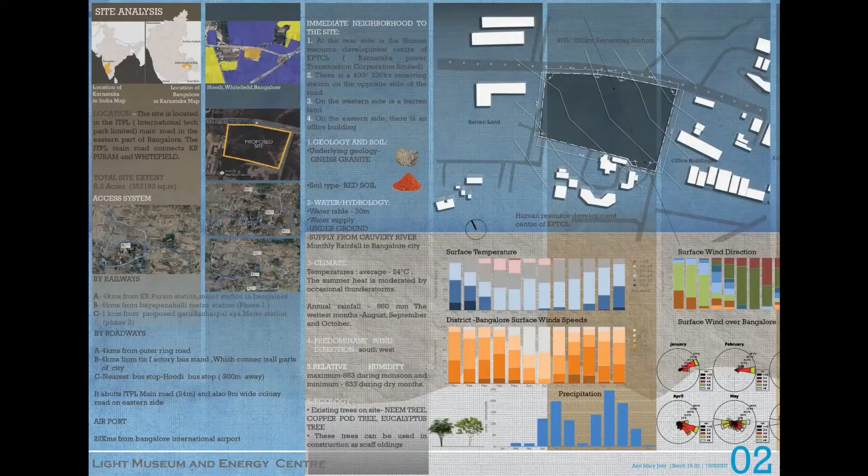It is a flat land with a slope of 3 meters, with a gradient of 1:70. The main attraction of the site is that a metro rail passes through it, making it easily accessible to people.

It has a water table of 30 meters, so the plot can be dug.

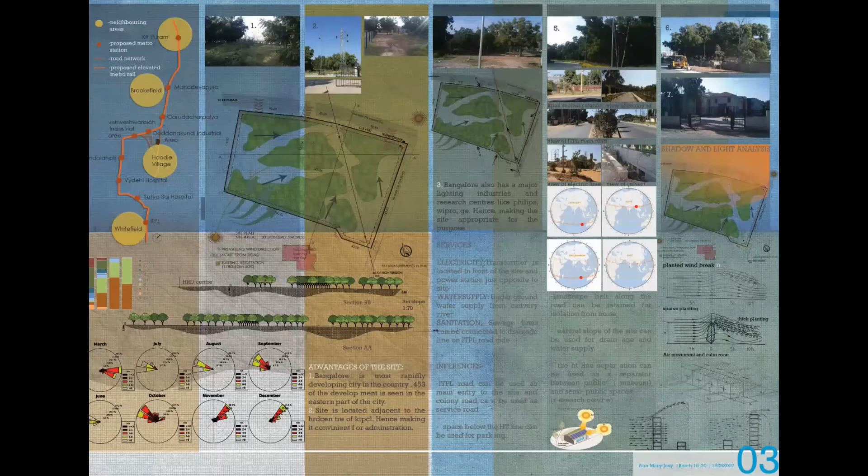Coming to the case study, NGMA Delhi, National Gallery of Modern Art, was basically done to understand the circulation and movement pattern of the building. It also has a good ceiling feature, where the ceiling provides natural lighting during the day.

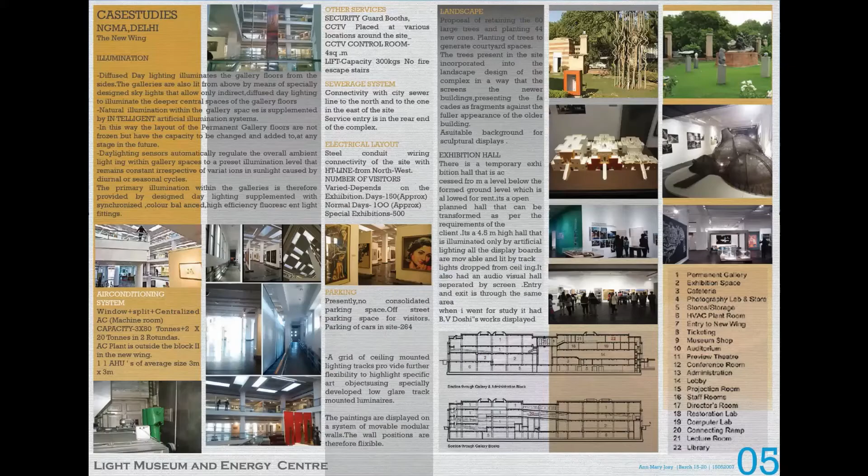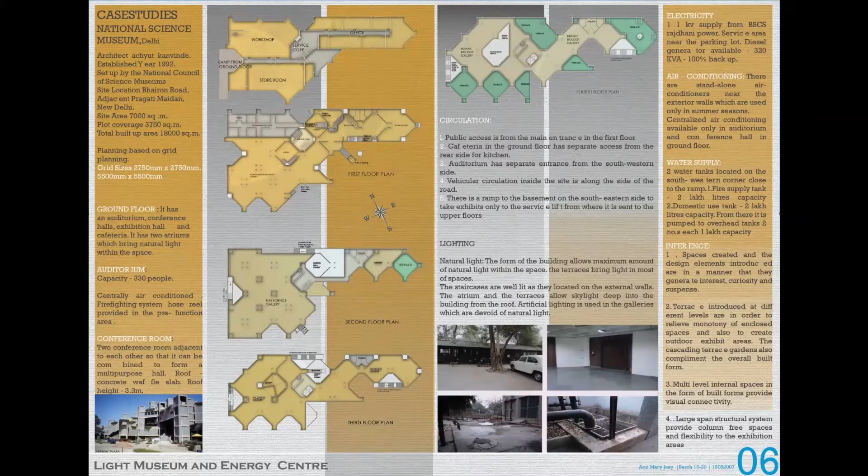The other case study is the National Science Museum, Delhi, which has an unusual pattern for a museum. It is designed based on natural lighting and is a small space compared to other museum type buildings, using natural lighting and ventilation.

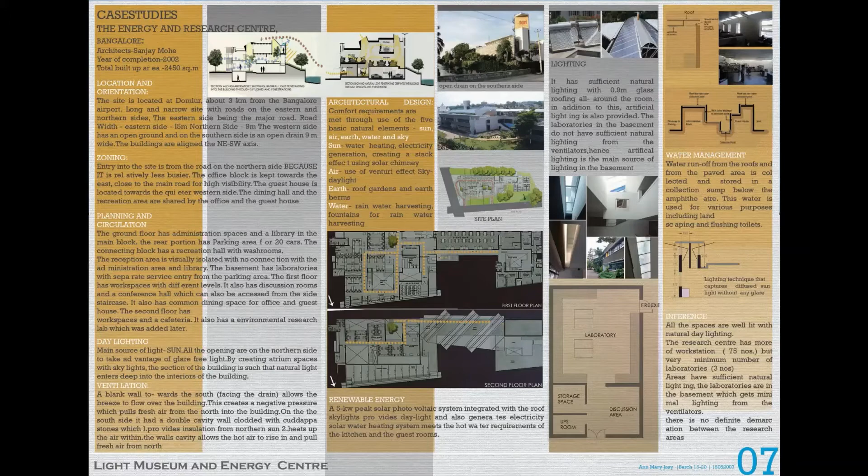The other case study for the research center was the Energy and Research Center, Bangalore, TERI, which was a building designed based on energy efficiency. They used renewable energy, with natural daylighting and ventilation, except for the laboratory part, which requires no natural lighting facility.

The other case study was the NTL Research Center, Noida, a basically rectangular shaped building which didn't allow any natural lighting to come in, as it was a place where thermal tests, lamp life tests, altitude tests, and all sorts of tests were done. So they were very sensitive to the sunlight part.

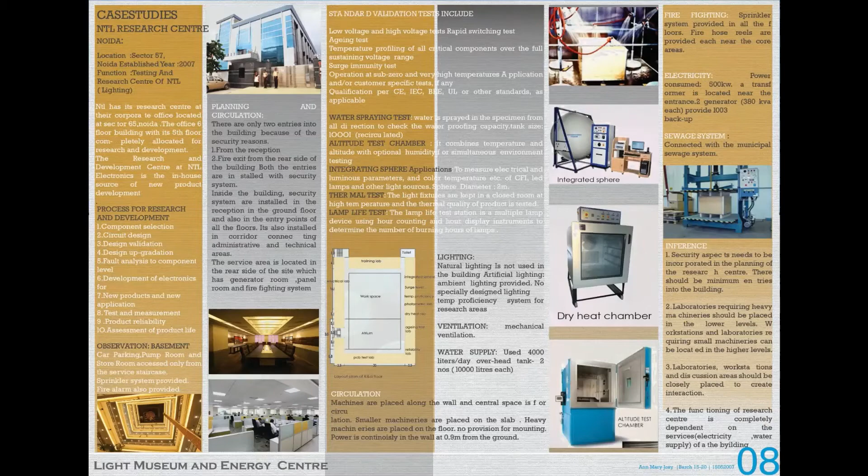And the basic data collection required for running of the museum - these are the equipments, along with their features and dimensions required, that help in building the research center.

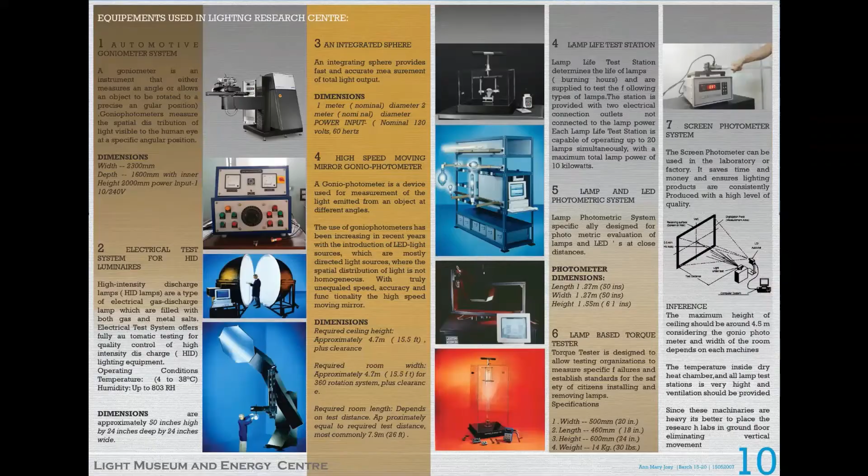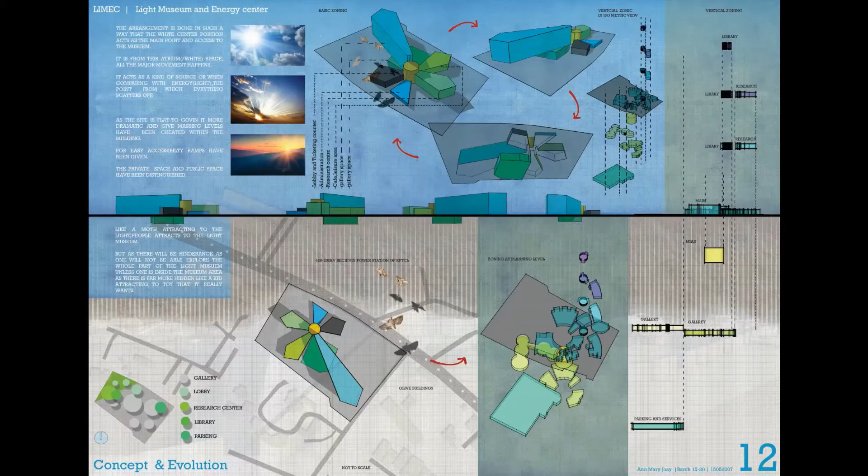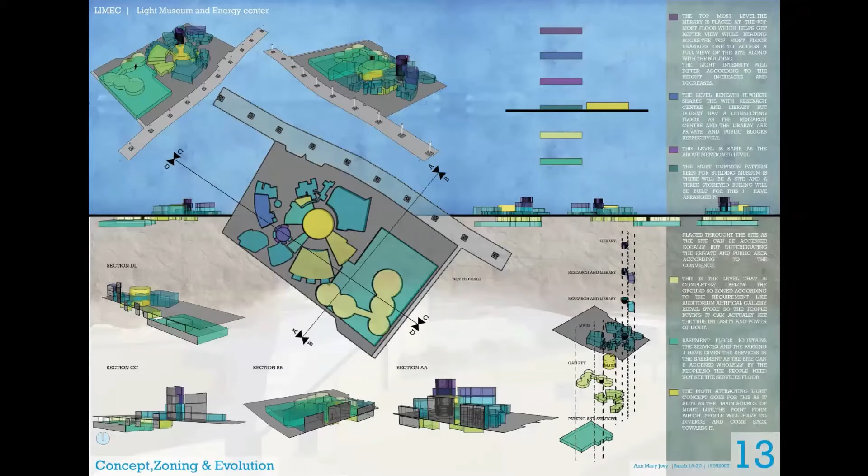These are the zoning and evolution in the site, and these are the proximity charts I've given, which are basically divided into the major museum complex, the auditorium block, the exhibition block, the staff block, the cafe complex, and the research center.

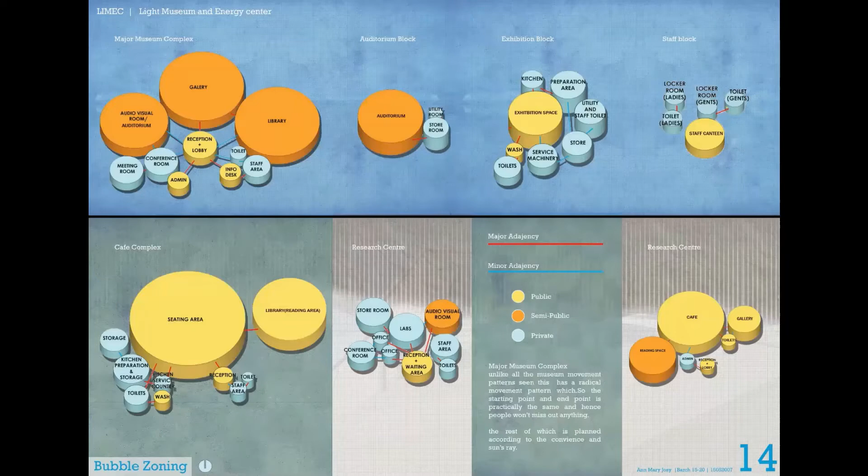The zoning is such that the site is in an industrial area that doesn't have much activity going on, so the only activity that can come up is when the light museum comes up. It is basically divided into private, semi-private, and completely public zones.

All of these are connected by the circulation part, and the basic coverage of sunlight is given for the private as well as the semi-private zones.

As metro is part of the site, it plays a major role, and the buildings are arranged according to it, so that people create a curiosity about what is happening inside the building.

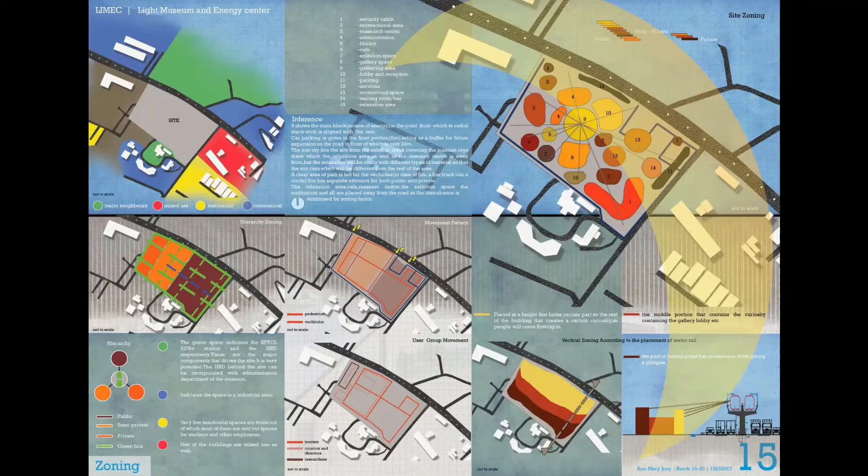Coming to the master plan along with the site, it basically has two entrances - one for service and one for public entrance. The public entrance is very close to the lobby space, so pick and drop off is very easy, and the service part is very close to the administration, research, and cafeteria region.

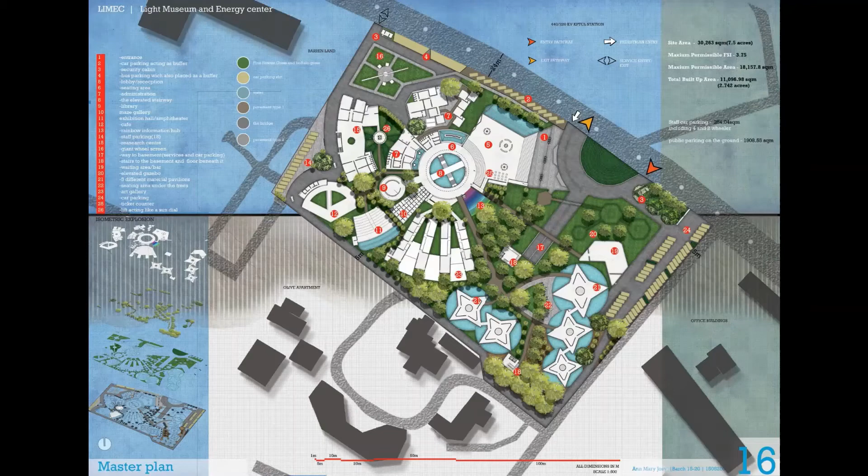The major part is the museum. The exit and entrance are the same, unlike the rest of the typical museum movement pattern. The ticket counter and gift shop are given in the same area, so that people coming in and going out will see the ticket counter and have to return their tickets, ensuring people won't miss out on anything.

So these are the basic roof plan and site plan, and the other one shows the movement pattern of the transportation, and this shows the building and the site's context, and there is a small canal like a channel moving along the site.

The water can be channelized like this. These are the basic zoning, and the yellow one shows the non-existing trees, and the green one shows the already existing trees that were there, so they're not being cut down.

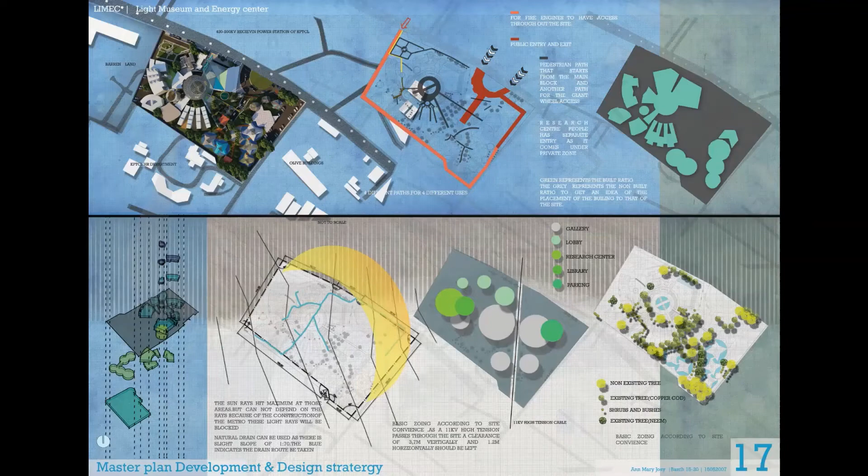The yellow portion shows the parking provided, and the little orangish parking shows the bus parking area. Basically, the parking is given in front as a buffer zone, because the road in front, which is 24 meters, may be used for future expansion. So that is for the buffer zone that was given.

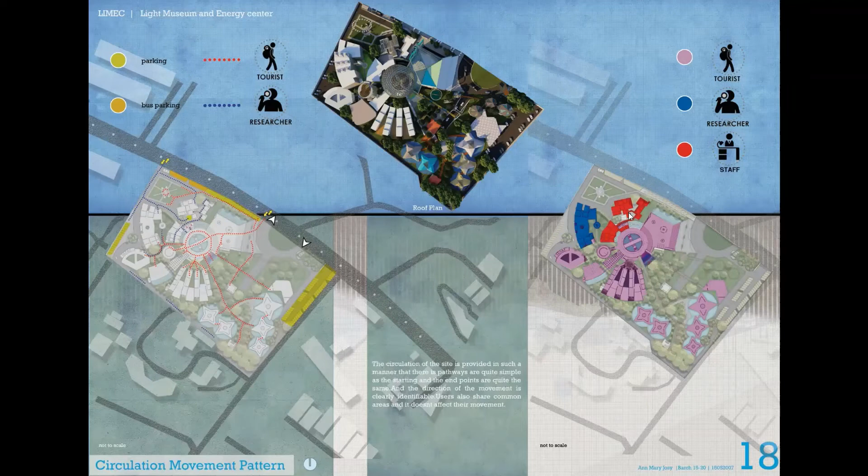The other image shows the basic movement where the people can go. The violet shows the tourists, the blue shows the researchers, and the red one shows the office staff.

So when coming to the plan, it is basically the lobby space, which is provided with three holographic projection areas, so it creates a different experience. As for the entrance, it is given at a height of 3 meters, which is usually small for an entrance of the building, but it creates a kind of drama, so I've given it like that.

It has a flight of 13 stairs, and we have to get down by 10 stairs down. When it comes to the middle portion, that is the main area, it has an elevated stair walkway, which creates a kind of lookout, like okay, this is happening here and this is happening there.

And for the information hub, that is the colored portion. It has a colored stair so that the light coming from all parts reflects from it and gives a rainbow effect.

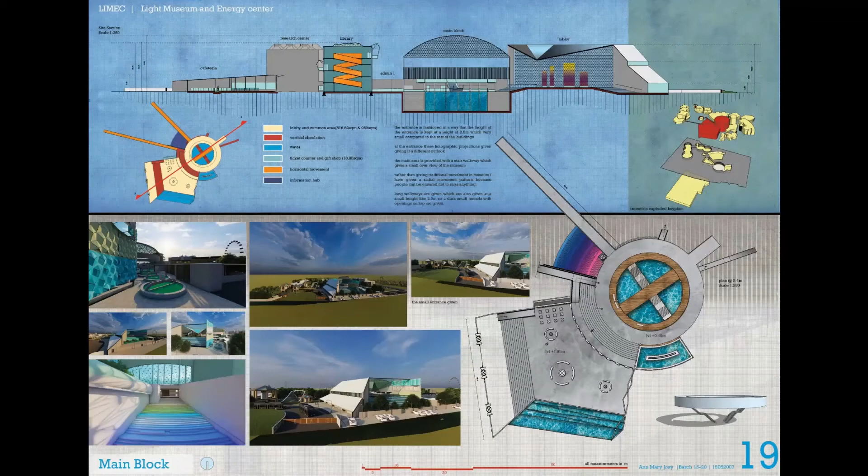Coming to the administration and the gallery part. Administration is basically zoned very close to the main block. It has offices, the director's room, the cafe space, the canteen spaces for the staff, the changing rooms, the locker rooms.

And the gallery spaces are provided: the introduction gallery, the history of light gallery, futuristic gallery, as well as the art form gallery, which are all separated by breakout lounges which open up to the pavilion region.

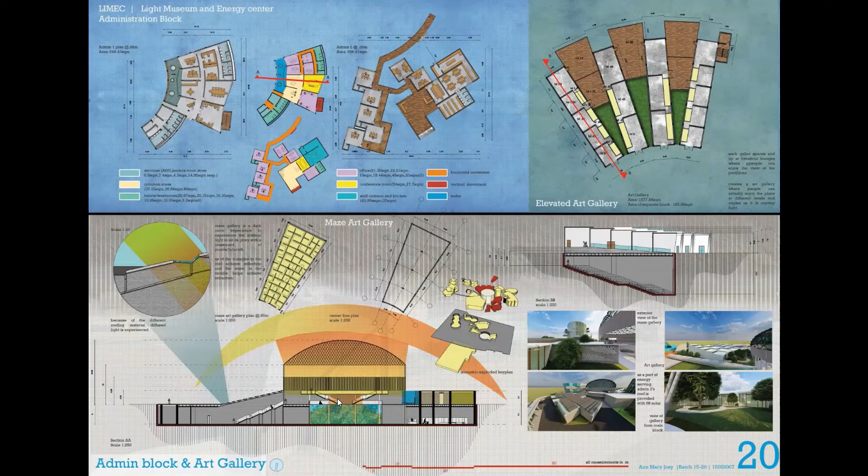So in the section, we can see that there is a huge aquarium-like portion. The sunlight comes in from the top, and there will be reflection and refraction happening.

This is basically the portion below ground level, provided with a retail store and the auditorium, which connects from the information hub, which has a screen projector like area, and the back of which has the photography and toilet area, which leads to the auditorium space.

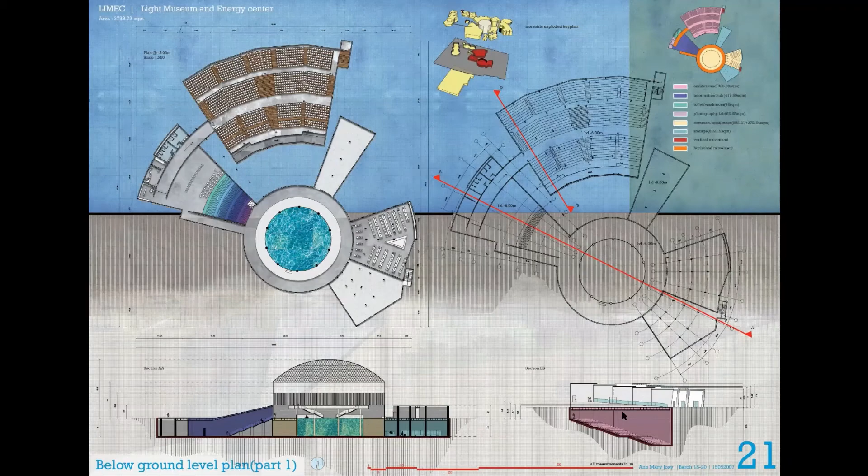So basically, this is where the refraction and all is happening. And the gallery space, beneath which comes the auditorium space.

When coming to the research center part, the research center is basically something that doesn't require light at all for their researches to happen. So the discussion area is the only portion where they require light.

For that, channelized lighting is given with a special type of roofing. The basic attraction of the research center is that the elevator is provided on the outside, on the exterior part, which acts as a sundial.

So the shadow falls on each of them at different angles and in different lengths of shadows, which is kind of amusing for the people coming from outside, as well as the researchers and the staff. So it doesn't interfere with the other private, semi-private, or public areas.

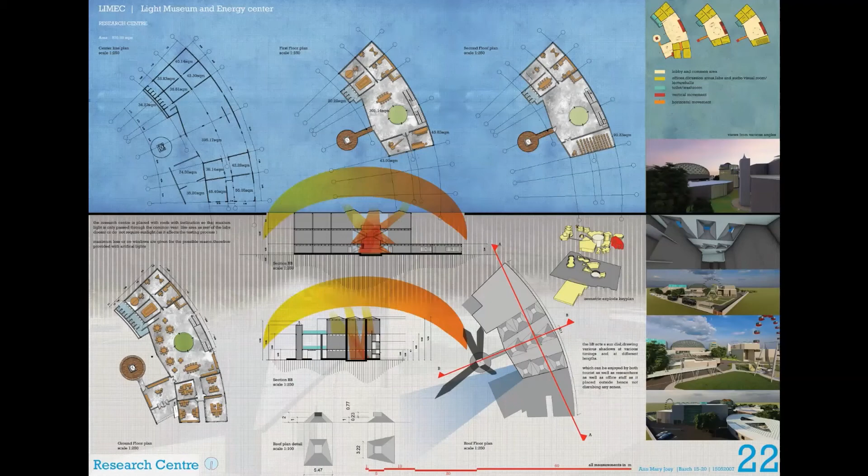And this is the library. The library is also where the light is being channelized. The orange portion that acts as a handrail is actually the bookshelf, which acts as a kind of shadowish portion where the light can come out through it.

And small reading portions are given within the library.

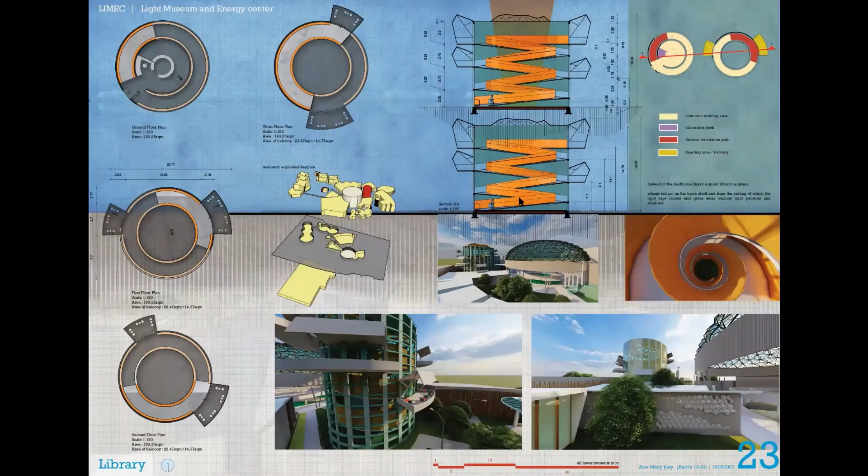And coming to the pavilion area. The pavilion area is basically provided with five different materials, which shows how light can pass through them and how light cannot pass through them, creating a different experience, which is also placed very far from the road, so disturbance is very less.

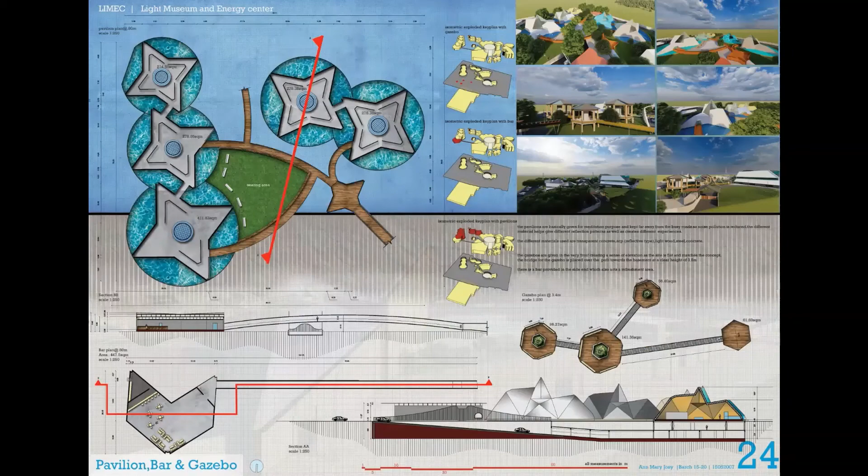And this is the cafeteria, given very close to the library space, because the cafeteria acts as a reading area for the library, so the people can actually access it as well.

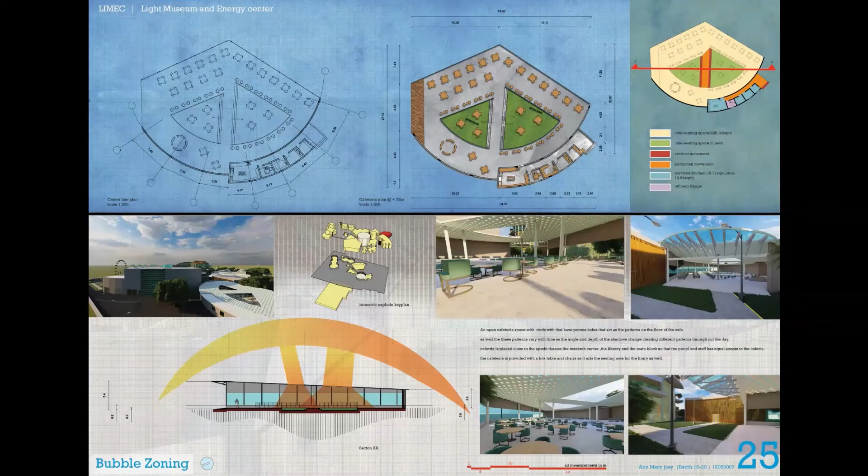So the research building, the amphitheater, the library are all given very close to the cafeteria, so people can access it pretty quickly.

And the LED and the sculpture room, which is basically beneath the ground level, and the basement, which has all the services along with a few car parking areas.

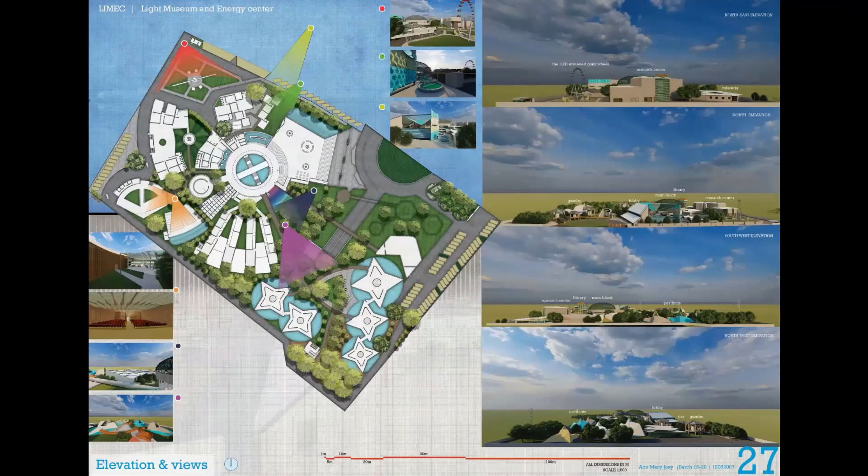And these are the basic elevation and the views from which people can see, people can see from the building.

So the special topic I've chosen was transparent concrete, which is basically for the interaction part. So basically, shadows can be seen from one building to the other.

People accessing from outside can see what is happening inside, like the shadow of the people moving. So it basically creates an interaction and curiosity for the people, like what is happening inside, how can people see, and all that. Okay, thank you.